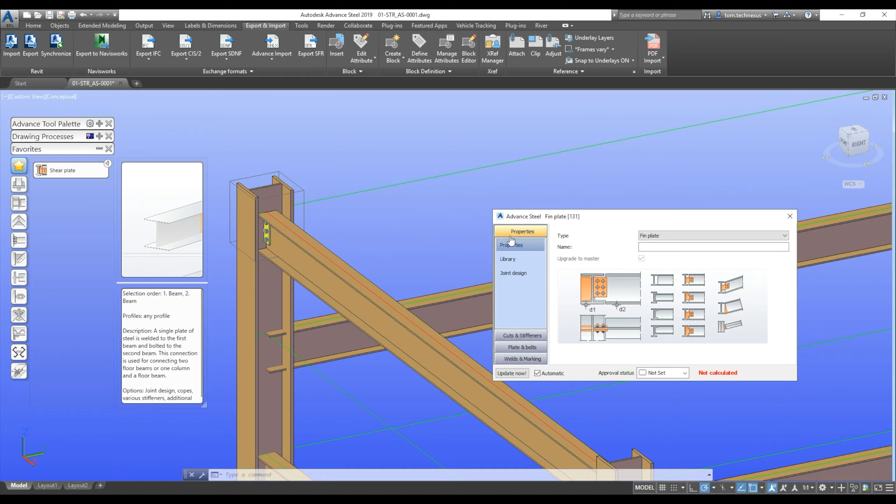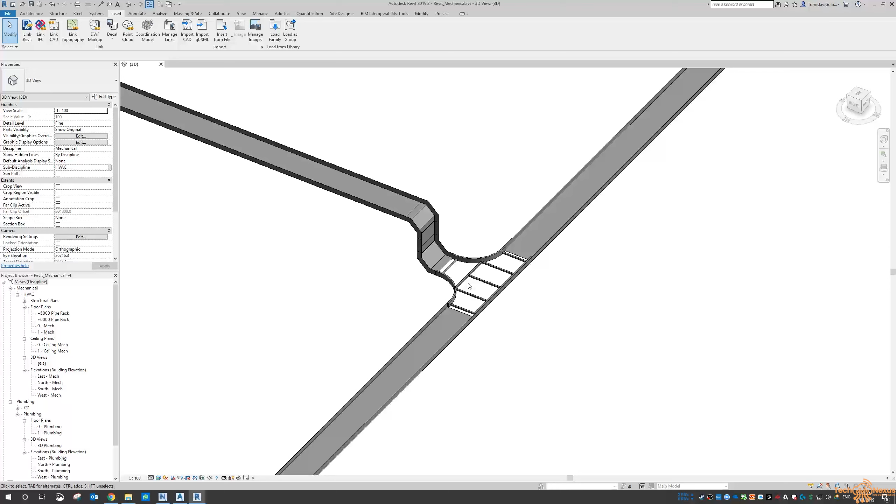Now, if you've been following me for the last couple of days, we've brought Revit into Navisworks with our sort of plant overlaid in the Revit model, and then we've located our cable tray from Revit, and in the last couple of days I ended up modeling up some of the fittings and whatnot within Revit. And as we all know, Revit is not going to go into Plant 3D. So it's unfortunate, but we have to export this out to an AutoCAD file for Plant to see it. And ultimately, I want to see these cable trays inside a Plant Ortho.

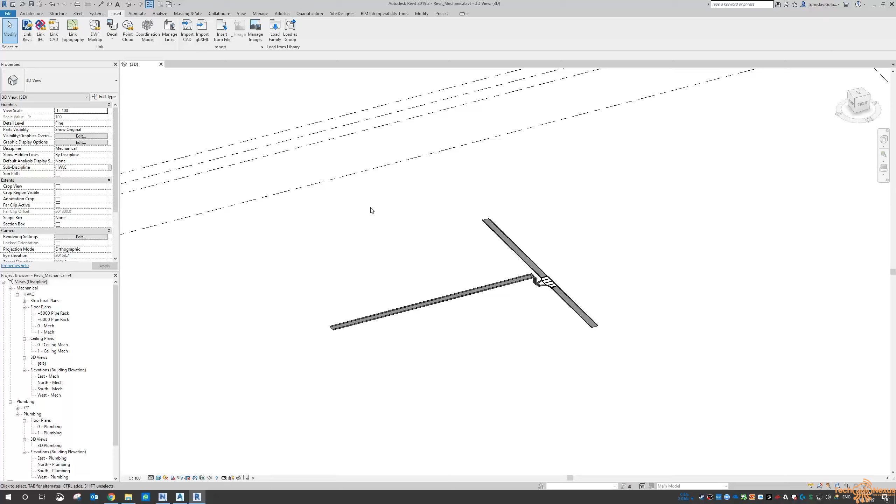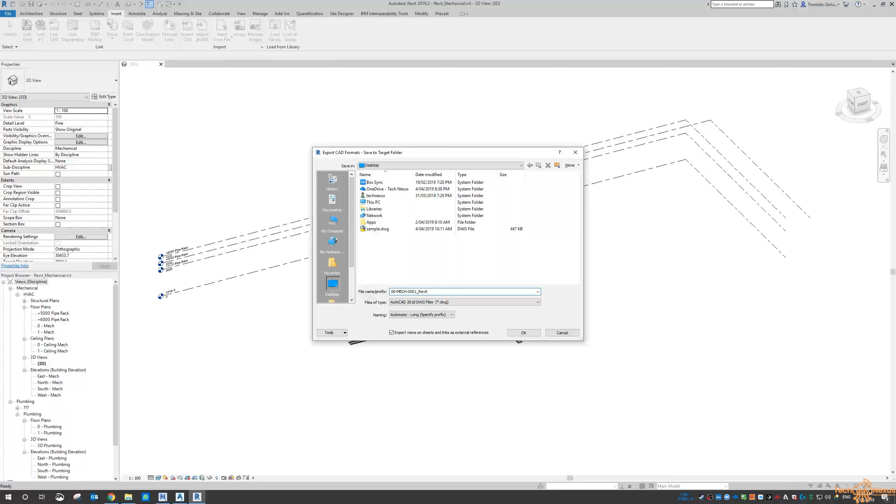Now, inside Revit, I just go to File, Save. So I'm just saving my model first, and then I'm going to use the export DWG command to export out this current file. So I'm going to call it 00-MECH-0001, and I'm going to put a Revit at the end of it just so people working in Plant will know that it's a Revit file.

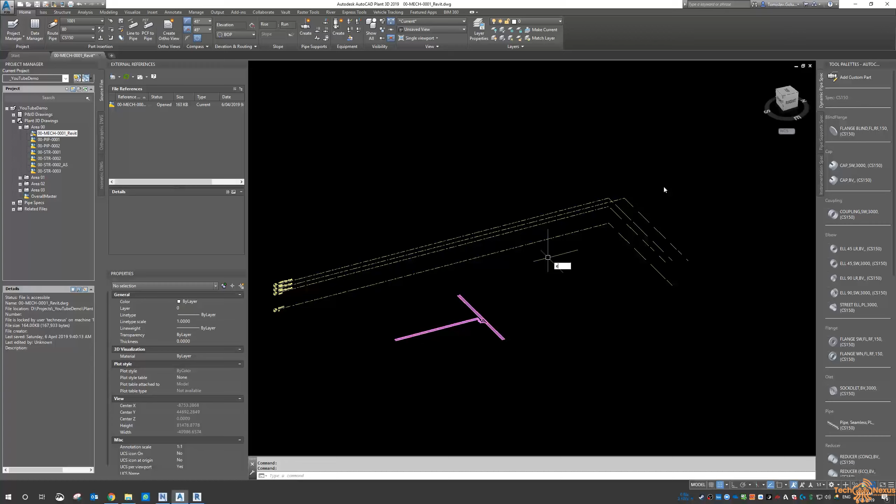So if we jump back to Plant 3D, and then I right click and I copy that drawing off my desktop into Plant 3D, so now it's part of the project. And if I open it inside AutoCAD, we're going to see all of those Revit elements in there. And to clean it up, we don't need to see all of these levels. And we're left with the Revit file itself. Okay, so I'm going to save that.

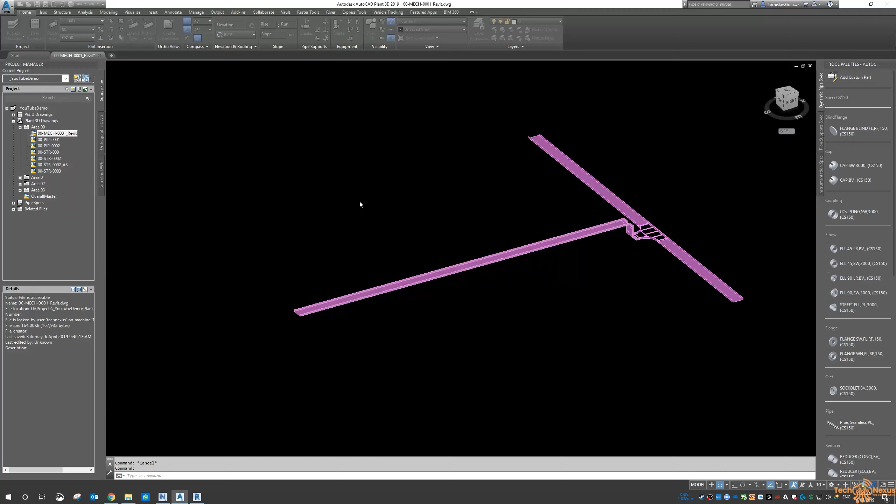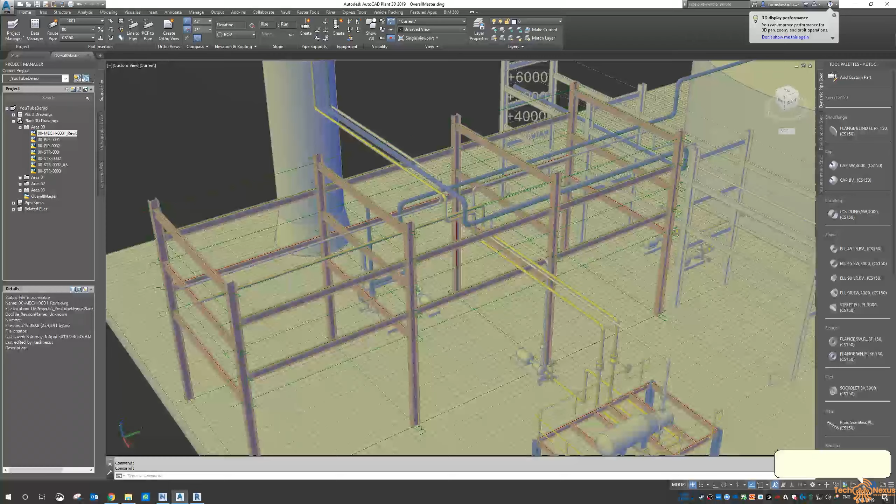And if I jump into my overall master, so this is the overall file that we have inside Plant 3D just to walk around and review the models, we can now attach that as an XREF into the overall master, and then you're going to see how our cable tray is going to sit along these pipe racks. Right click on it, XREF into current drawing, overlay, yes, and then there it is.

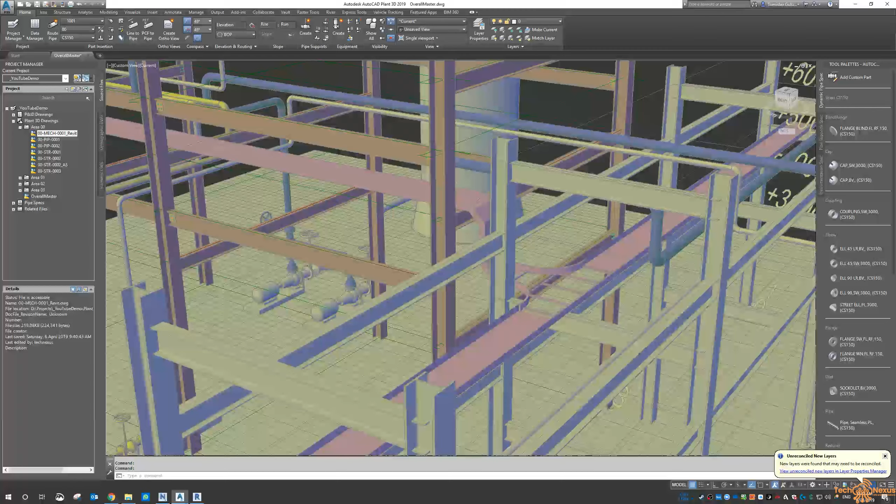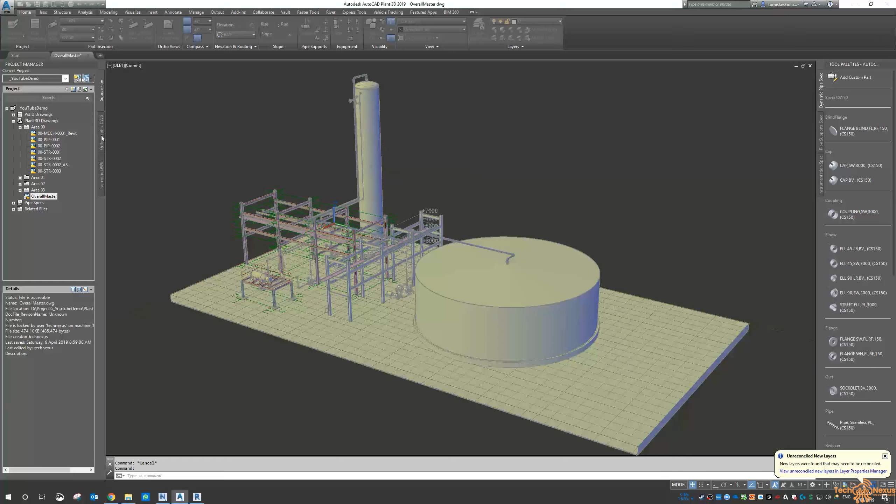Okay, there's that pink colored cable tray, and if we zoom in and around, we're going to see that we have the risers coming in. So it all looks pretty good for the time being, but just for now we're just going to leave it as is. So now I want to jump into the orthos. So close off the overall master, switch to the orthographic drawing. Let that just close and save out.

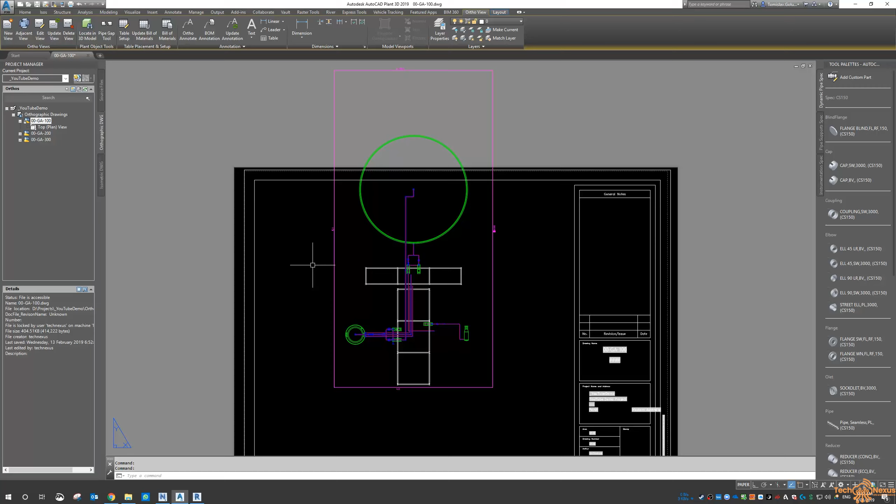And then when I switch to my Ortho tab, I've already got some files in here. So if we have a look at 00GA100, that was just an overall representation of the model. And I haven't changed the scale yet. I'm not going to, but obviously for your project, you'll need to. And I want to edit this view, and I want to add another model. So I click on Edit View, select the viewport.

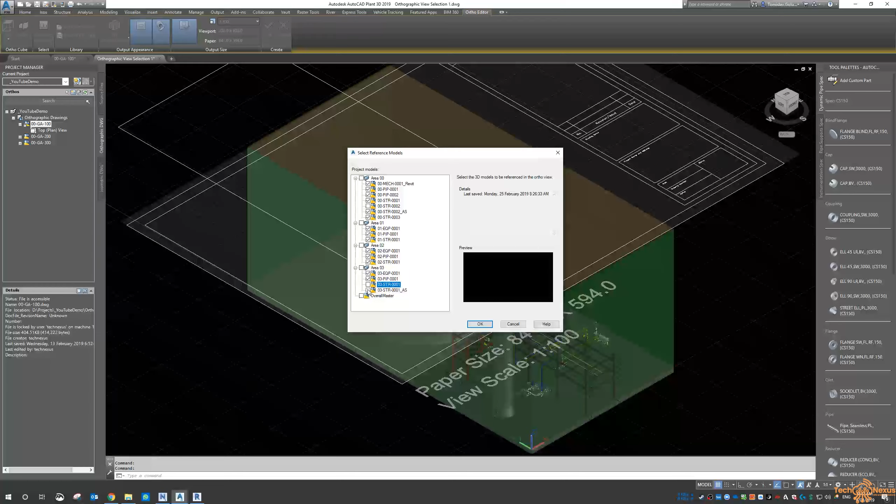And now I want to come up here and go 3D model selection, and I want to pick the Revit model. We're not selecting STR002 because we've got the Advance Steel file in here. We've got the area 1 files, the area 2 files, and the area 3 files. So I'm going to detach the area 3 structure and then attach the Advance Steel file in its place. And then we're just going to let that run. So click on OK. I don't need to do anything else here.

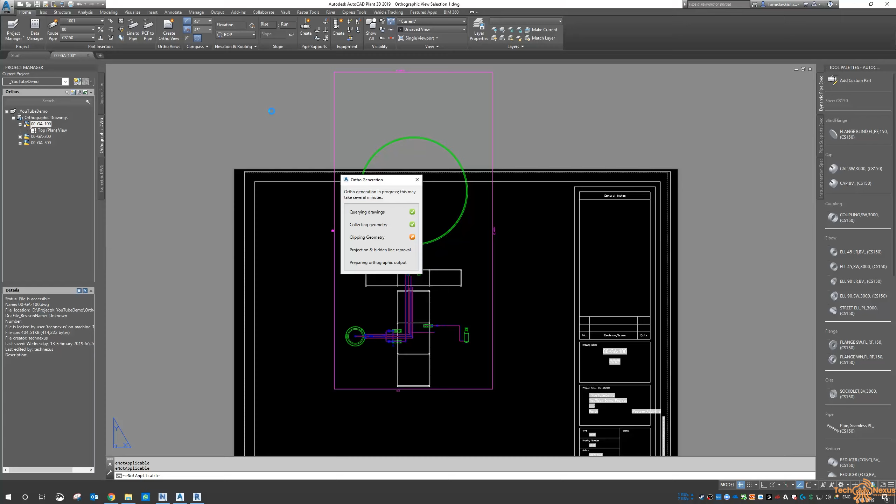Again, for this video, for my project, I'm not getting into as much detail as what you guys might normally do for your project, but we're just going to let that run. And then we're going to see our new updated file. So there's that cable tray. So it is from Revit. And again, unfortunately, it is not a live model or a live file. So you will have to, at some point, for want of a better term, dumb it down to an AutoCAD file, and then that way inside the orthos we can see it in there.

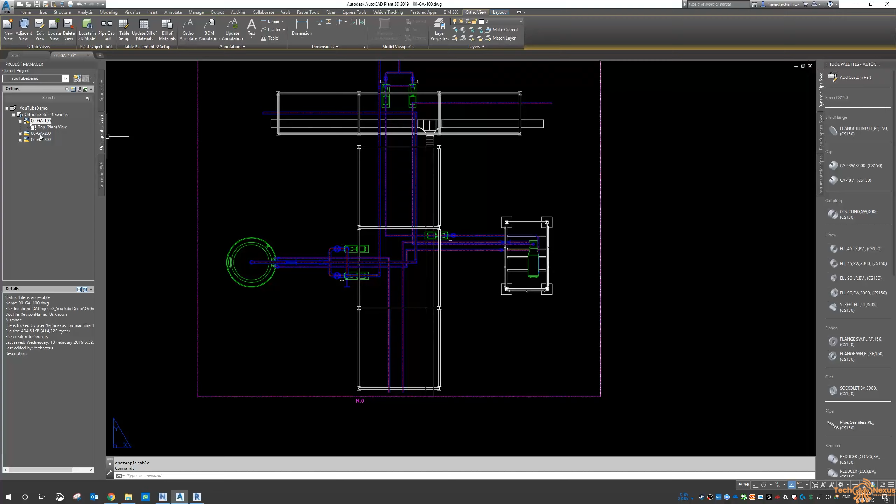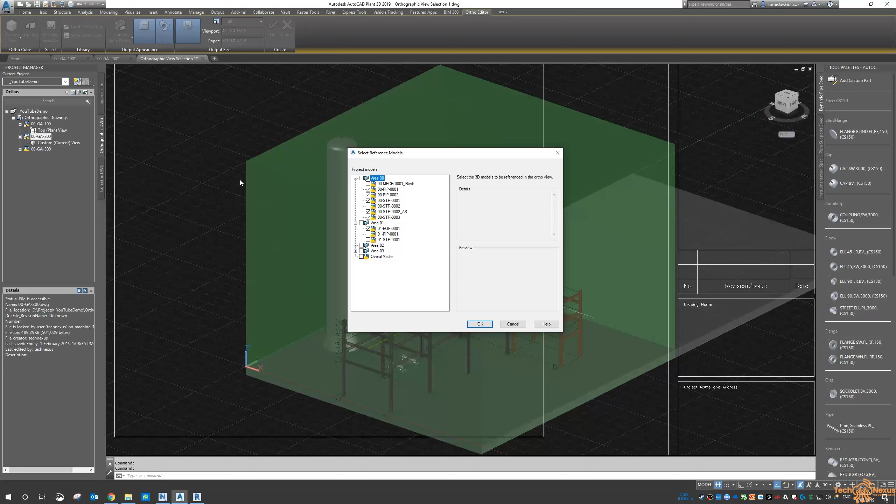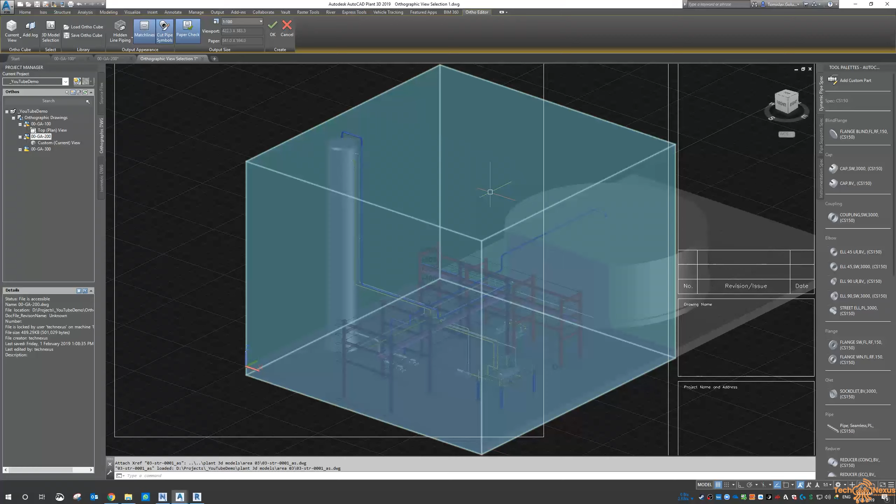We can do the same for this view here, and we have one of the equipment areas with a couple of the structural models. So we'll do the same thing. We'll edit the view, select the viewport, and then click on the 3D model selection again. And we're going to pick all of area 1, all of area 2, area 3 equipment, piping, the Advance Steel model, the Revit model as well, and go OK. Okay, so it's linked all the files in, and then we click on OK.

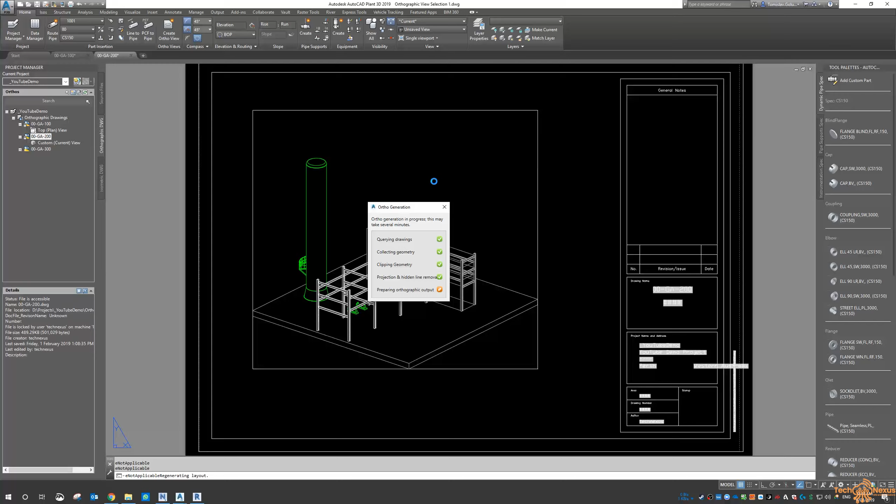Again, like the first one, this is quite large, so when I first created that view, we didn't have as much information or as much detail, so the view was only processed against what we currently had, but you will need to obviously go through and update and make changes as you see fit. And you can see here we've obviously trimmed off that tank, but we can tidy all of that up later. And here you have the cable tray. It's just hidden behind there.

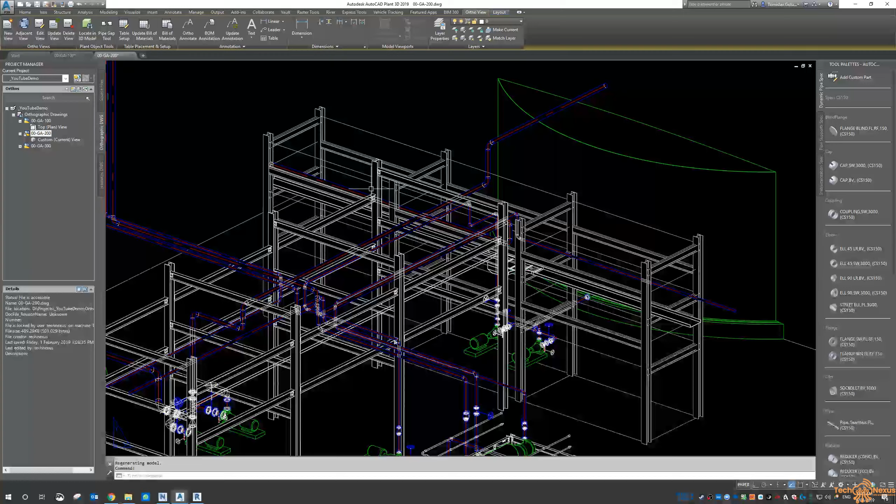And also what's happened, I've left it on accidentally, is the hidden lines. So we don't want that. I'm just going to click on edit view, select the viewport, and up in the palette up here, it's got hidden line piping. And I want to say no hidden lines because I just want a sort of perspective or isometric view of my model, and I don't want to have to fiddle around with hidden lines and turning them on or off. I just want to present this to whoever might need to see this information, and I just want to see it without the hidden lines.

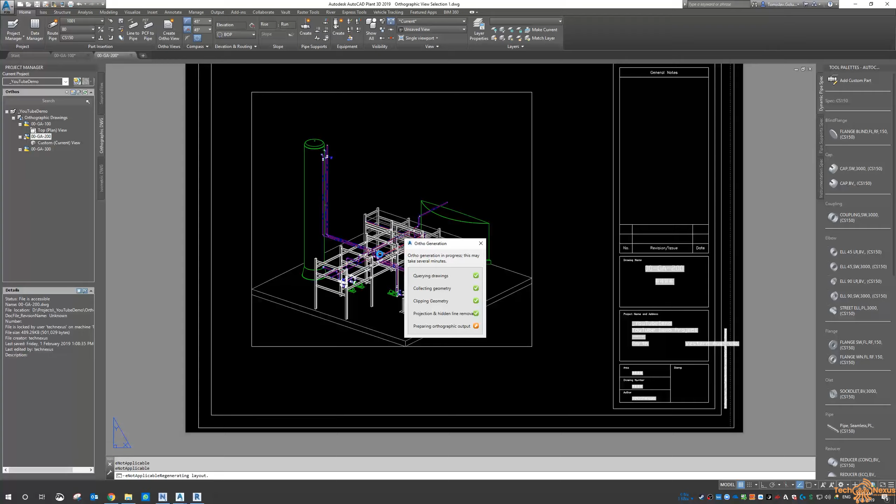So Plant 3D is going to recut that view and take the hidden lines out, and there you can see we've got our cable tray. Again, it's probably hard to see just in the background there that we do have that in there. So again, hopefully it's been informative for you. Unfortunately, we have to dumb that model down from Revit to get it into Plant, but once we do get it into Plant as an AutoCAD file, we can cut views and sections through that.